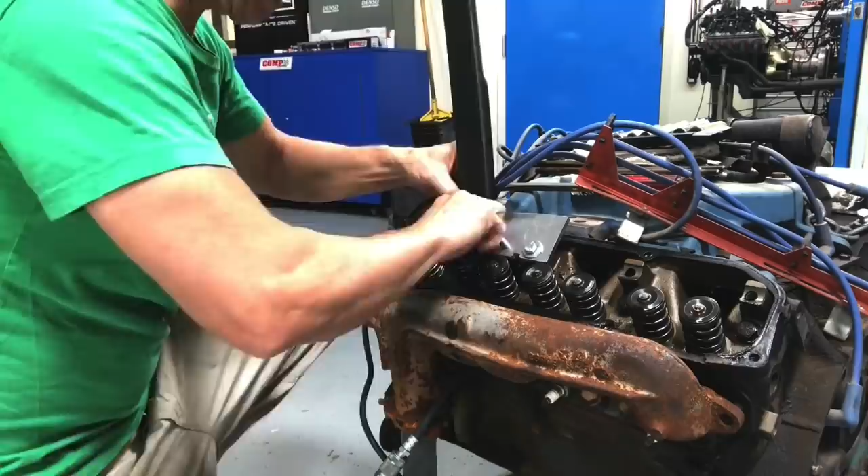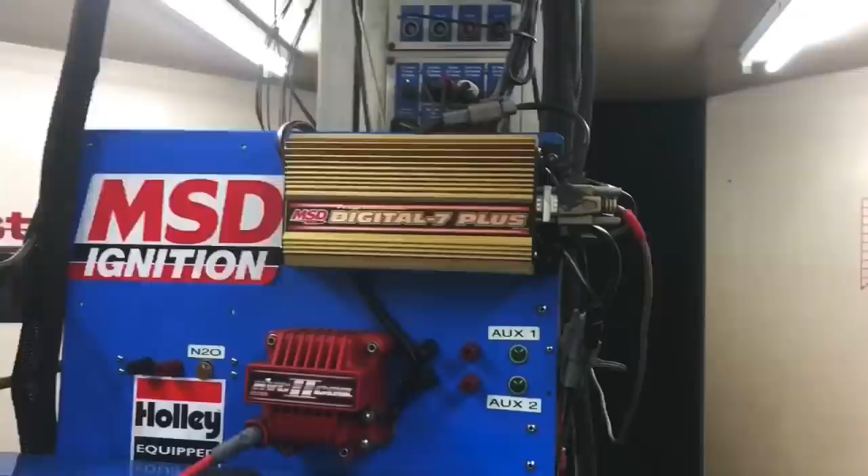In part 1, we upgraded the valve springs, then installed long tube headers and electric water pump. We hooked up the factory electronic ignition to our MSD, then installed a Holley carburetor on top of our Edelbrock intake using an adapter. Then it was ready for dyno testing.

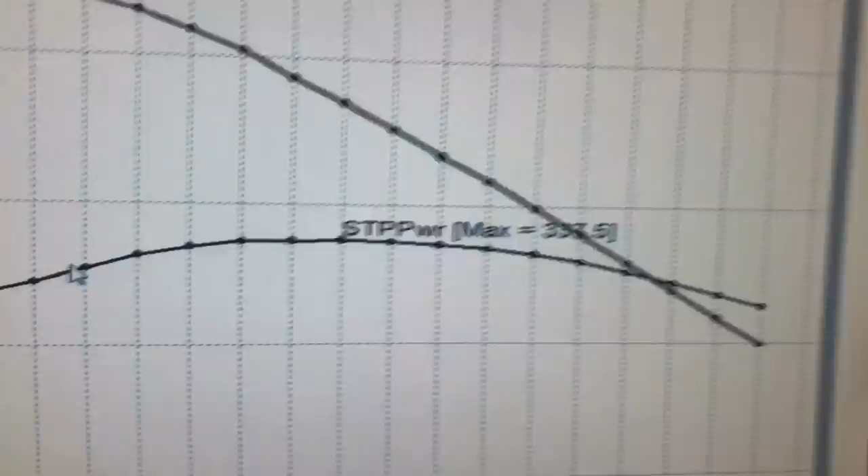In part 1 of the video, it looks like I forgot to put the power graph in, and that's like my most favorite thing. And I was also wrong about the peak power numbers. I think Brule tuned this thing up a little bit more. So it made 337.5 horsepower and 443.8 foot-pounds of torque. Now let's find out what we can do after a cam swap.

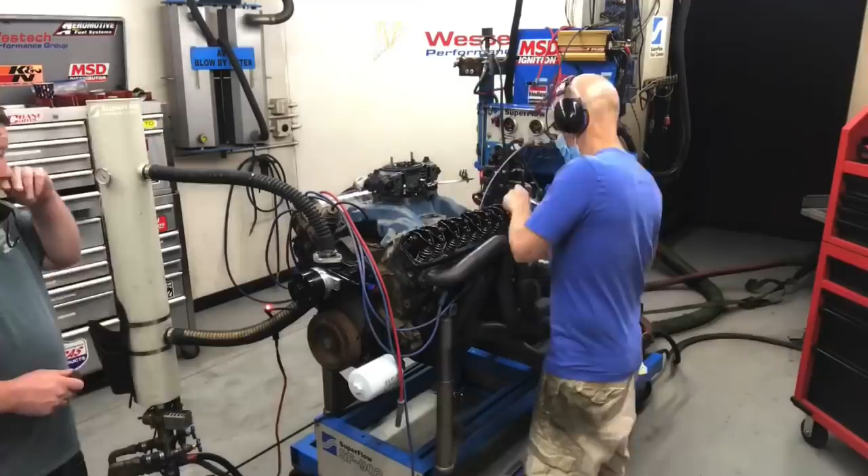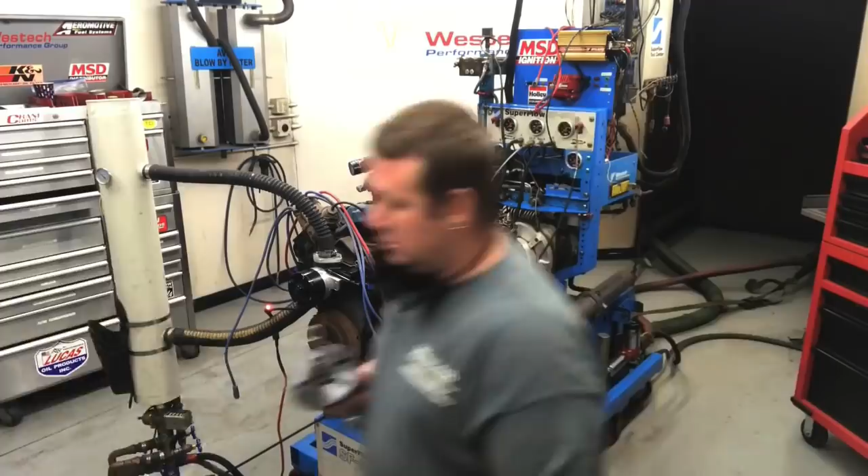After making baseline runs on our 440 Mopar, we tore into it for a cam swap. Now it's time for one of those high-speed install sequences. First we remove the valve covers, followed by the rockers and push rods. Then it was over to the other side. Troy set to work on removing the balancer.

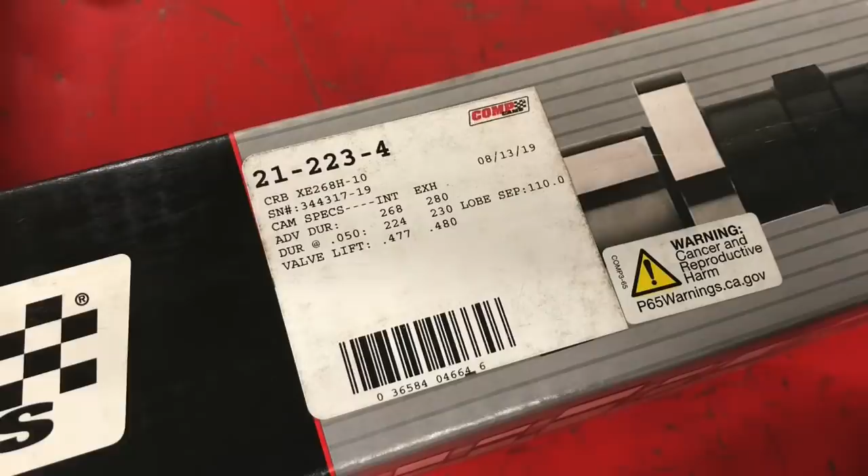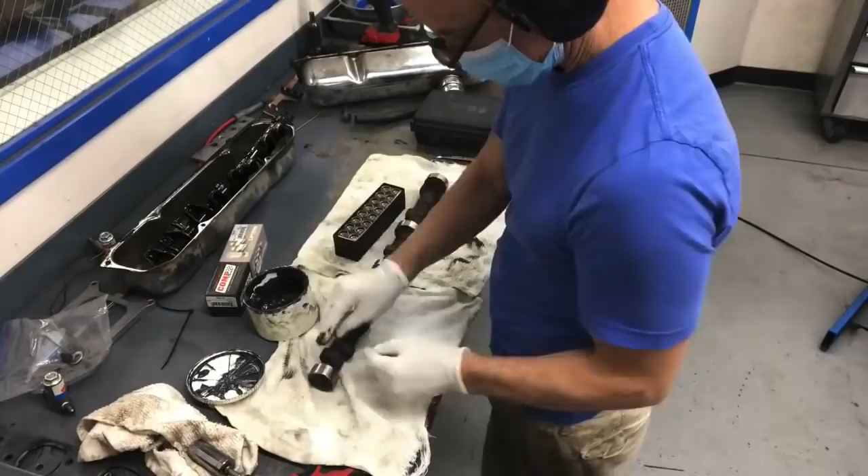Check out the specs of our Comp Extreme Energy cam. Then it was time to remove and prep for assembly. For installation, we installed moly-based assembly lube on all the cam lobes. Then followed the same procedure on all the bottoms of the lifters.

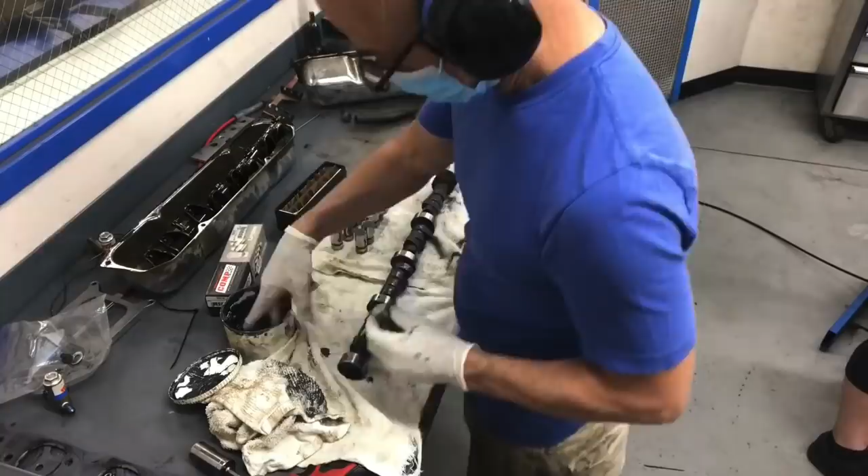After removing the header, I scraped off the header gasket, which was already leaking. Off came that factory balancer, to allow access to the front cover. After installing a new header gasket, we installed the header. Steve tightened everything up.

Troy managed to pry the front cover off. So this is definitely not stock.

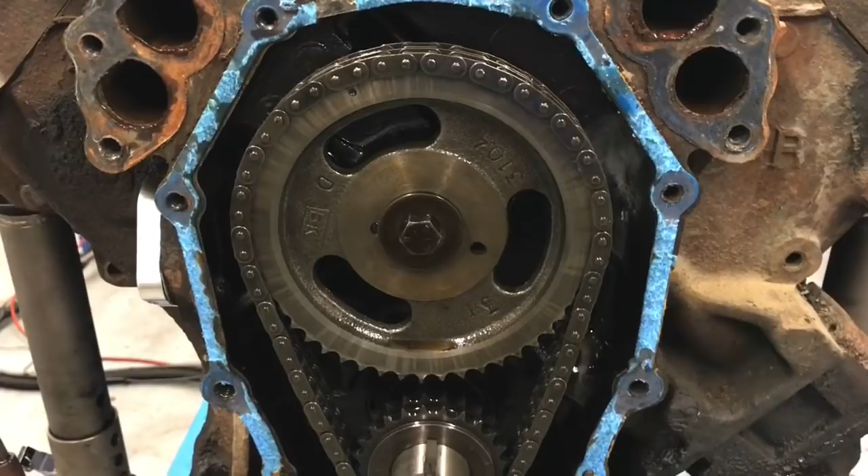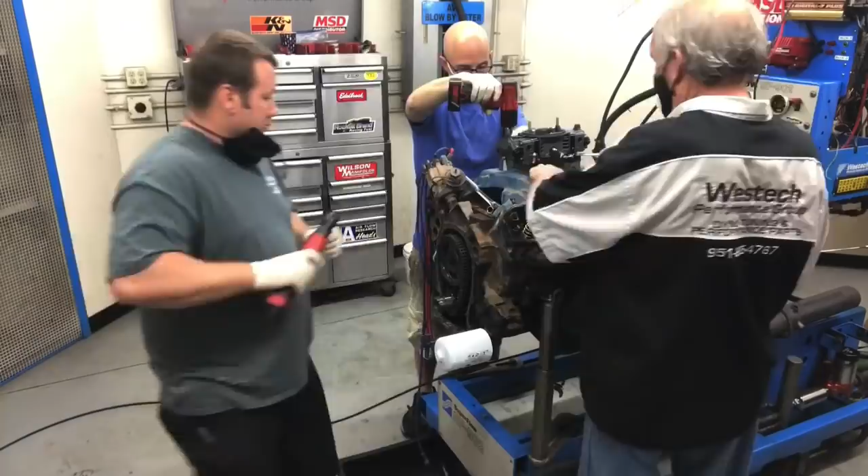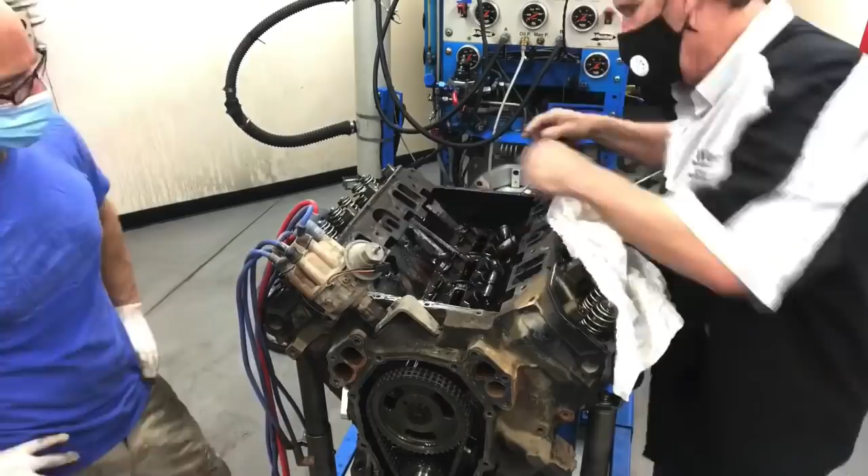Hey, stop standing around. Why don't you get to work? Pull that intake off, followed by the valley gasket, then the lifters. But there's always one stubborn one. Then out came the cam, and in with the new one.

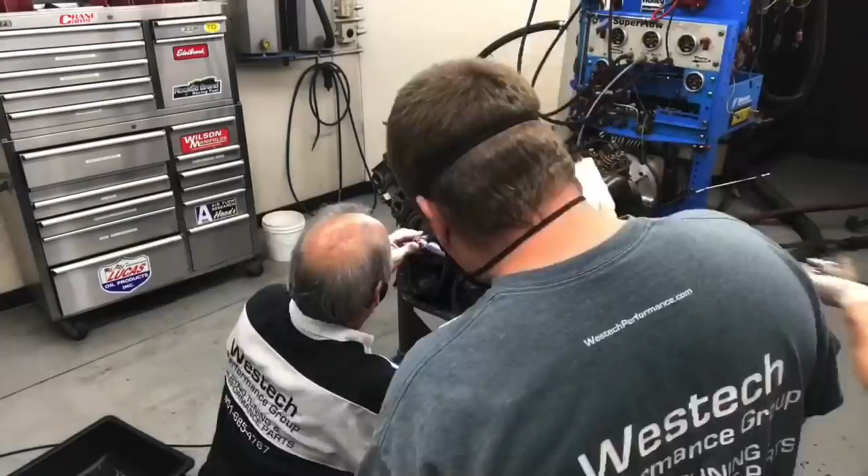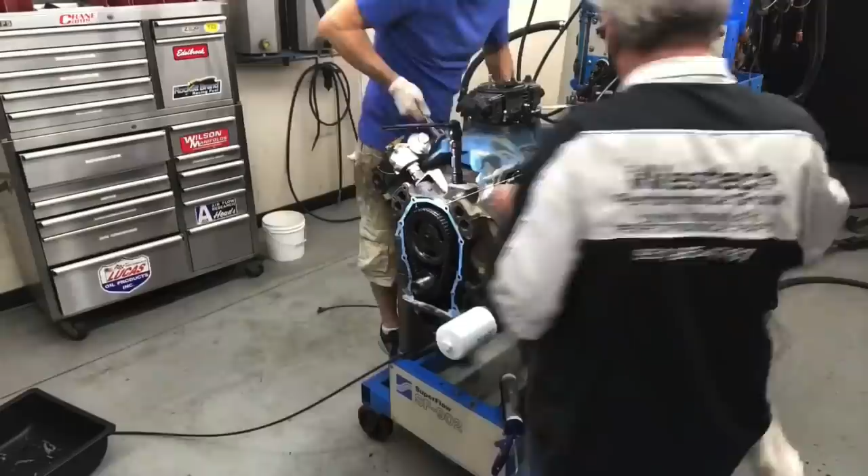Now it's time to put everything back together. I want to thank Steve and Troy from Westech, and they crushed it on this cam swap. Time to reinstall the valley cover and the intake manifold, followed by the rockers and push rods. With the valve covers installed, then it's time for the front cover.

Only a few odds and ends left, and it's ready to run. Troy reinstalled the balancer, followed by the water pump. While Troy hooked up the water, I installed the spark plugs, then the plug wires. Just make sure they don't touch the headers. A quick cleanup of the dyno cell. She's getting ready to run.

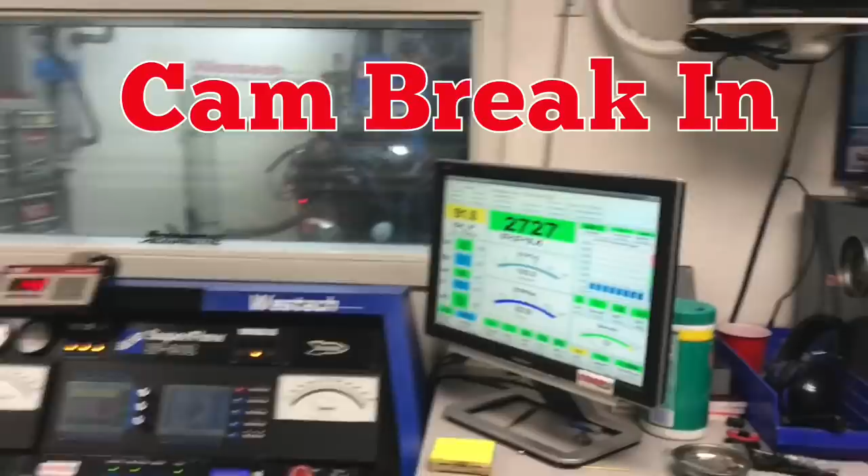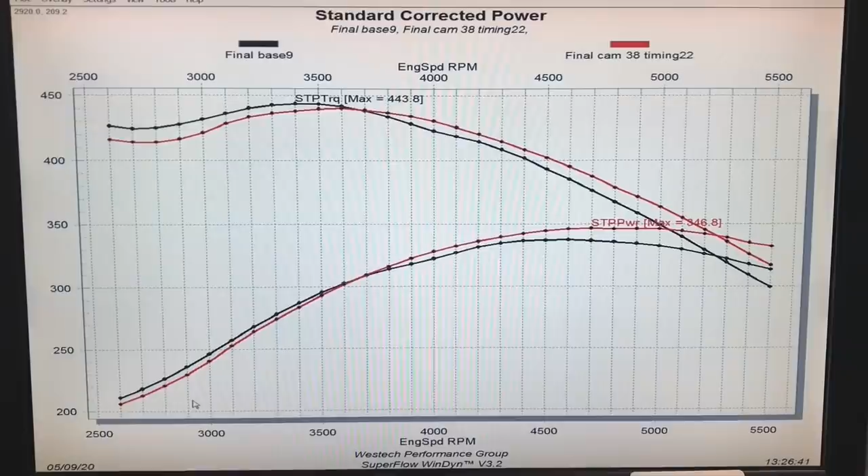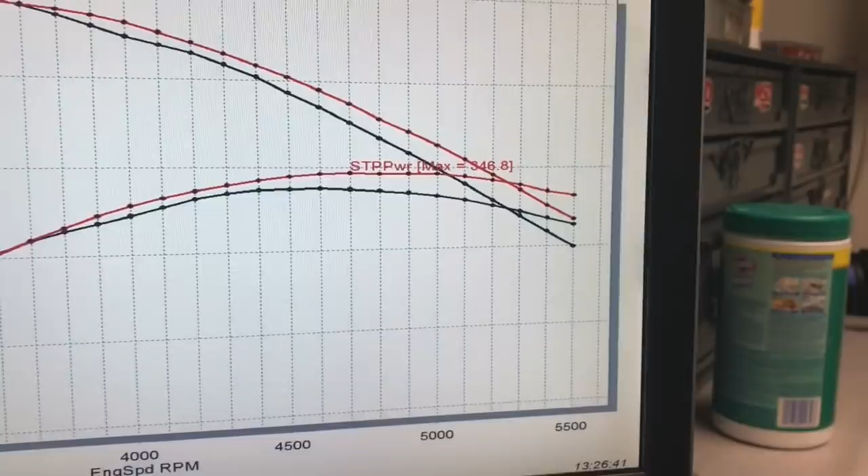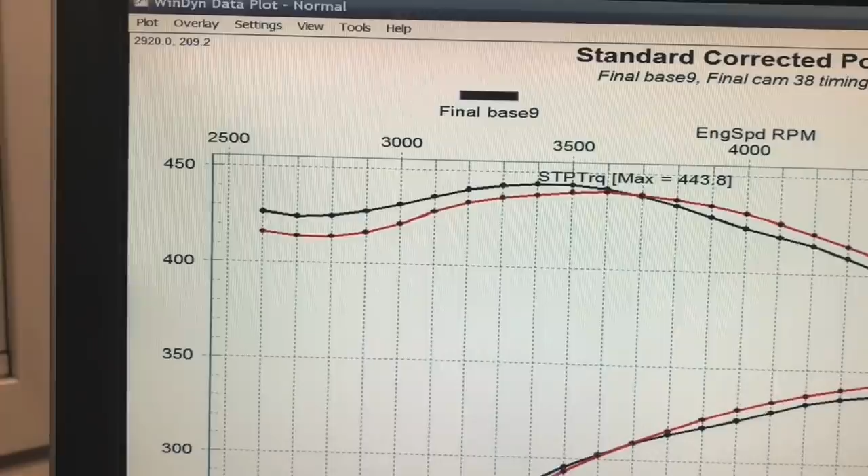After installation of our Comp Extreme Energy cam, the power curve naturally changed. It picked up power at the top. It only picked up about 10 peak horsepower, but as we rev higher and higher in the RPM range, the gains get bigger. We're already out past 20 horsepower at 5,500. And we did trade a little bit of low speed power down here compared to that RV cam, which we think was probably like a 204, 202, something like that at 50.

Now it's time for some nitrous. Okay guys, we got the big block 440 Mopar up on the dyno. We just ran it naturally aspirated, basically stock, although it didn't have a stock cam in it. We also ran it with a slightly larger cam than the RV cam that we found out was in there already. But now it's time to make some real power. We're gonna install this Sniper Nitrous.

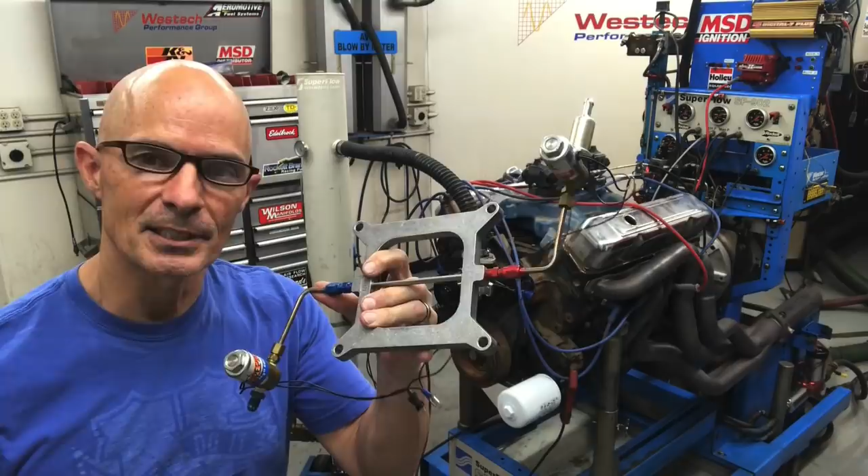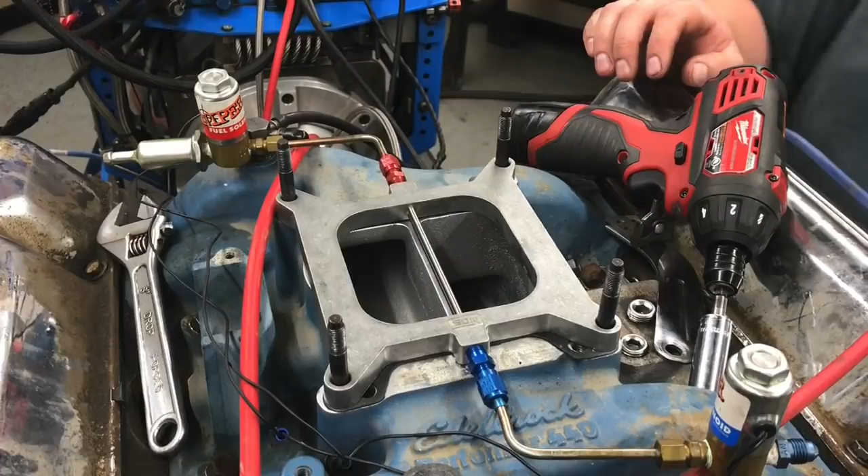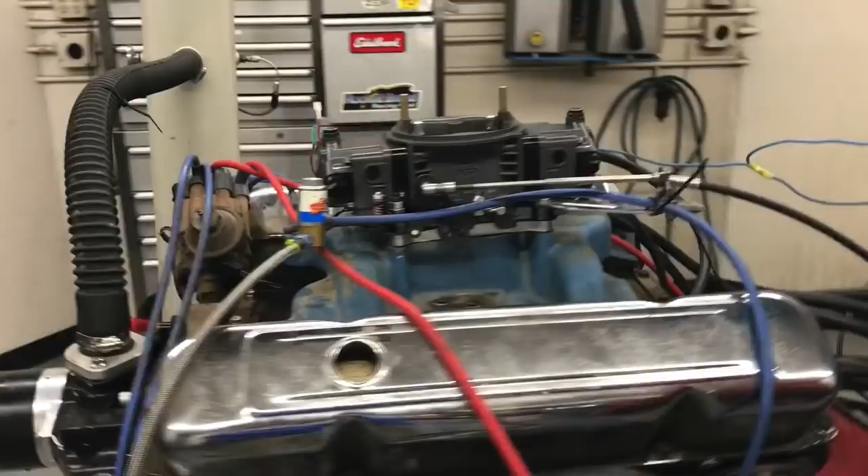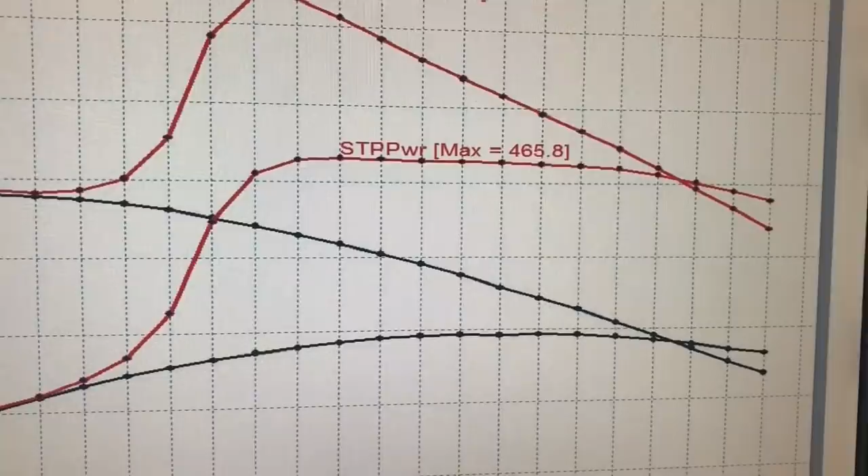With the nitrous installed on our 440 Mopar, what do you say? Let's make some noise. Now these are the gains we like to see. The nitrous kit obviously works well. Nitrous always is awesome. And that was a little Sniper plate kit, and it works really well. Big gains, peak power is up to 465. Peak torque was up to 568 foot-pounds. And this was with a 55 jet in the kit.

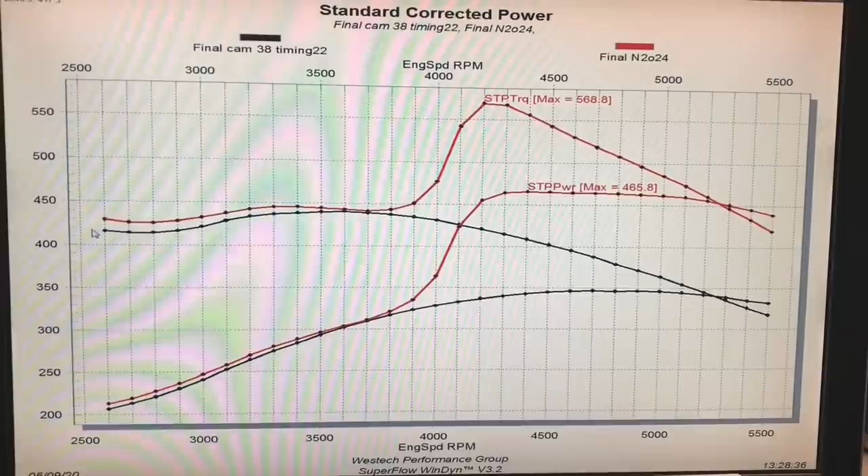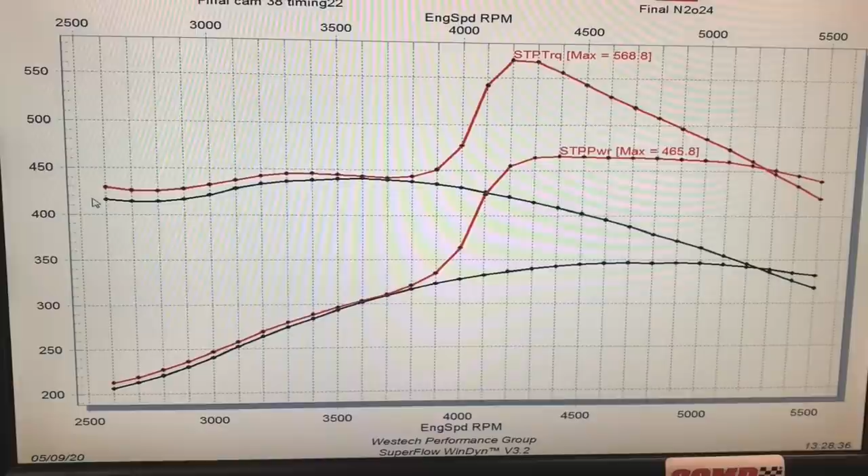Worked out really well. In my opinion, if I was going to run nitrous on this thing, I don't think I'd even do the cam swap. I think I would probably just add a little bit more jet, run the cam that was in there if you got a little RV cam or something. Obviously this cam that we ran, the 224 cam, would be worth more power compared to a factory cam. But even a mild RV cam or this cam with nitrous, nothing but good. Now this thing really needs some boost.

So what did you guys think about the results of our motorhome madness test? For me, I was both happy and sad. I was a little disappointed in the results of the cam swap. I wanted to see more than 10 horsepower peak to peak, because when we run that kind of cam in a small block Ford or a small block Chevy, we usually get bigger gains. Now, in this motor's defense, it already had a fairly decent cam. I mean, it had an RV cam, which is perfect because it was in an RV.

The nitrous is another story. Nitrous is awesome, and even more nitrous is awesomer. And that's exactly what happened when we applied nitrous, like this plate kit, on our 440. It made more power, like it always does. But even more importantly, it showed us what the potential is lurking inside this motor. And it gave us a good idea what to expect when we run boost, which is coming up in part 3. Using these stock exhaust manifolds, I'm gonna build a DIY turbo kit. You know, like you should.